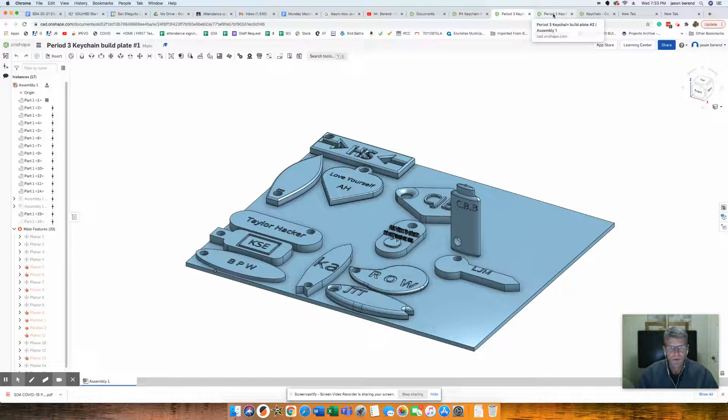Here are some examples from a class last quarter, so you can get the idea that you can be creative. The only requirement is that you have to have your initials or your name on these, so we can identify who did it and get it back to you. So that's the assignment.

If this looks hard to you, I'm going to go over something similar. You can pause the video and do something similar, then do something custom after that. All right, so that's what we're going to do right now.

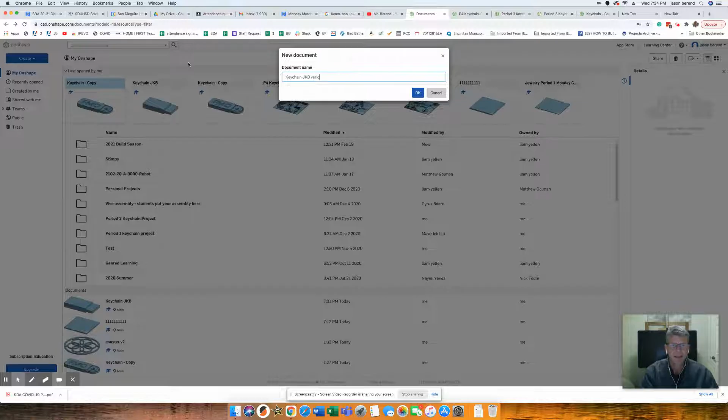I'll be giving you the dimensions that I think would be good. It would probably be a good idea to put your initials in the file name, that way we can know whose it is at a later time when we put it on a shared document.

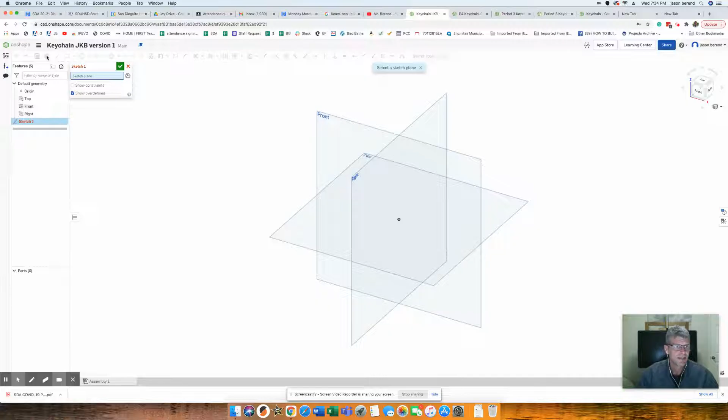You can design from the top, that's what I normally do, but this time I'm going to do something different. I'm going to design from the front. So I'll hit Sketch, click on the front, and zoom in. So I'm kind of designing from the side at first.

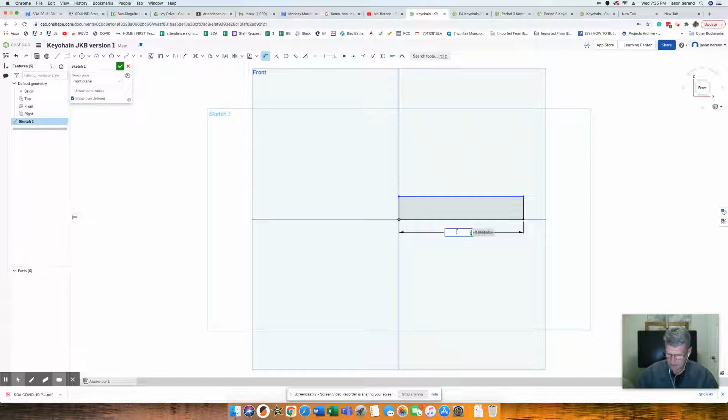Let's say you wanted your keychain to be - I'd say it should probably be less than 1.5 inches long on average, but it's up to you. And how high should it be? I'm going to say 1/4 inch or less, that'd be my recommendation, but it's up to you.

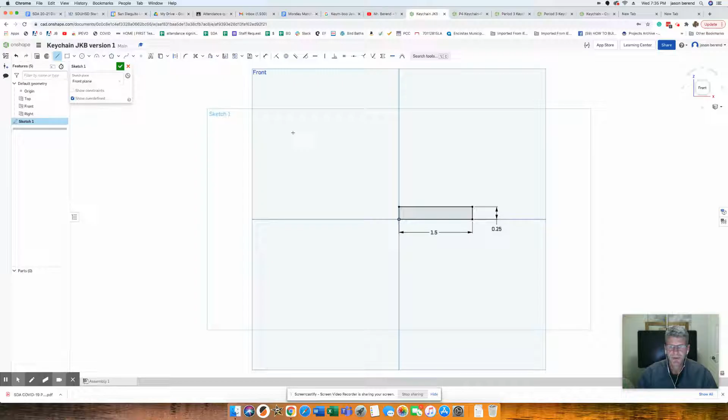On the last one you saw there was a bit of a profile to it, and I'll show you that and go over a new command too. Let's say I wanted this line to be 1/2 inch, and this line here maybe...

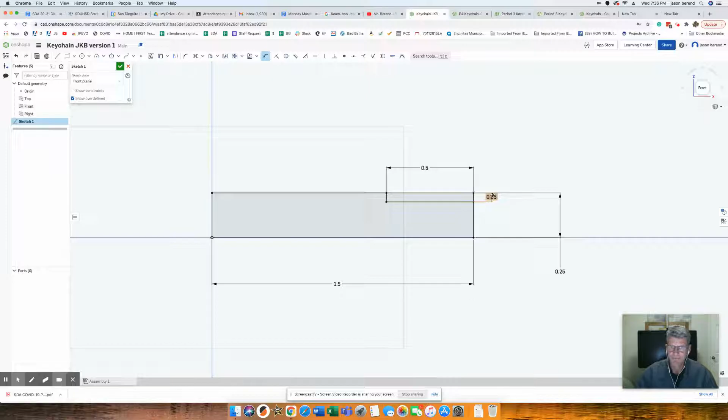So I'm going to do a command called mirroring. When you mirror, you have to have a line to mirror about. Sometimes I'll draw a temporary line, like snapping to the midpoint here and just drawing a temporary line. Let me show you how the mirror command works.

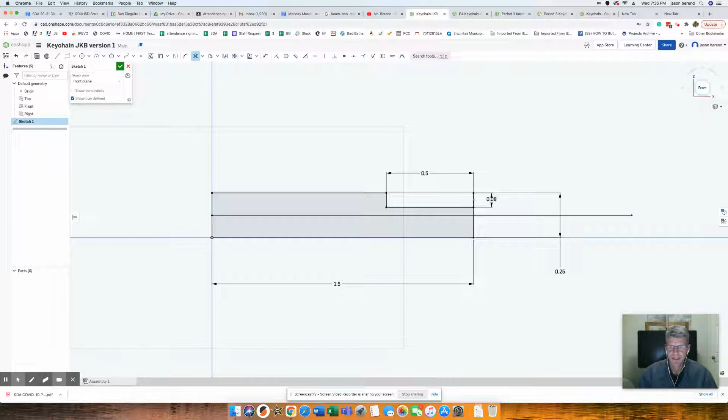Before I do that, let me just trim two lines here - this line and this line. So instead of drawing these two lines again and dimensioning them, I can just mirror them. The mirror command is right here, right next to offset, which we've gone over.

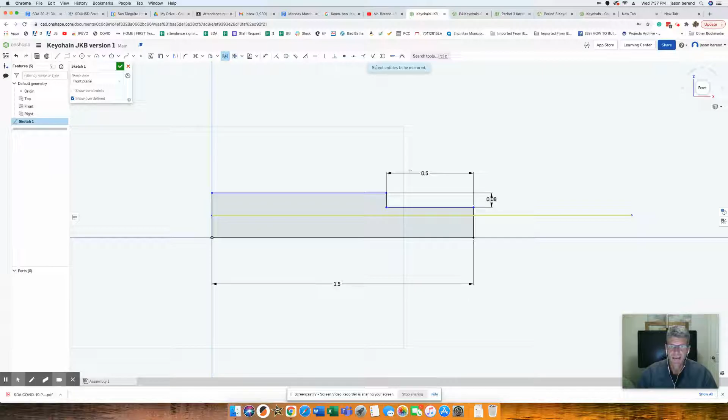It says select a mirror line, so I'll click this line. Then it says select entities to be mirrored, so I'll click on this line and that line. That's how mirroring works. I can press escape to end that command, and I'll trim this line - I could trim it or delete it. I'll trim this line and this one.

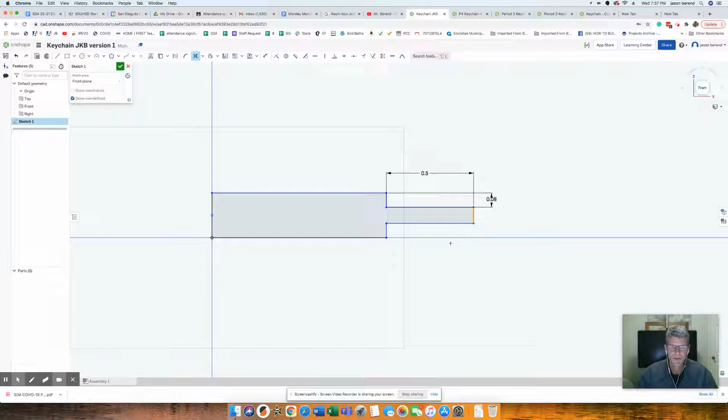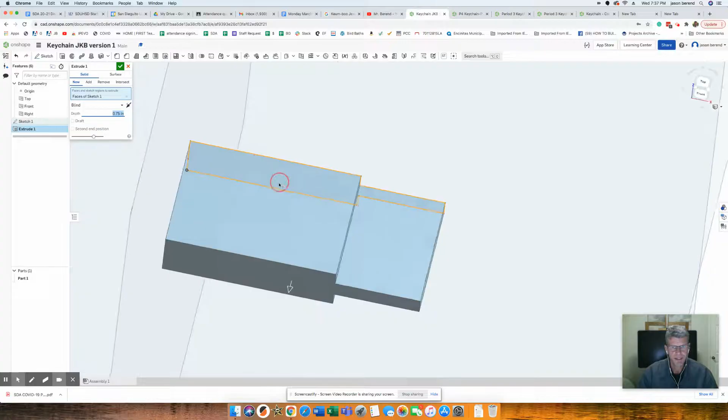Now I'm going to extrude it. First I'll rotate. I'm going to say it should probably be 3/4 inch or less, but it's up to you. Actually, I think I should have said probably 1/2 inch or less.

So now I'm going to go over a new command - the fillet command.

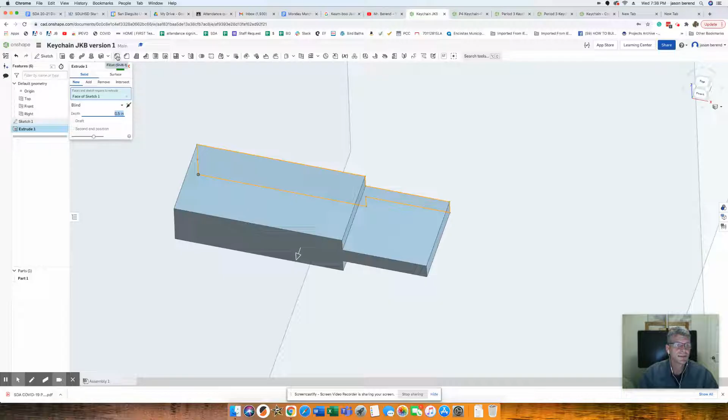With the fillet command, you can type in a dimension here and carefully click on corners like this, and adjust with the dimension how much you want the curve to be. Now it's 0.2, so if you have other sides you want to do, you can add them.

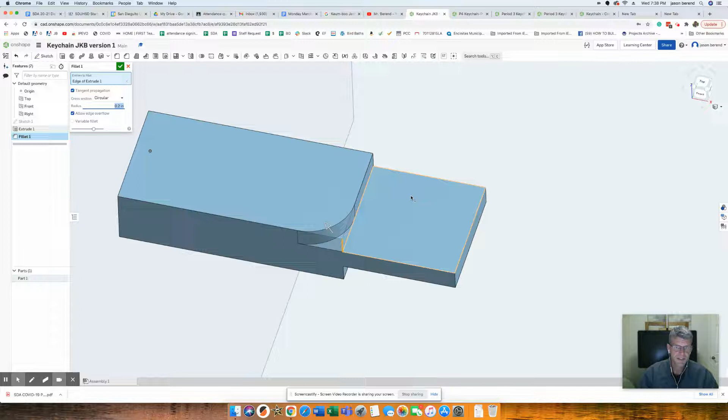So I could click on this one - notice that populated right there. I can rotate, and I can also get this side. But all I can do right now is 0.2, you can't have different ones on the same fillet operation.

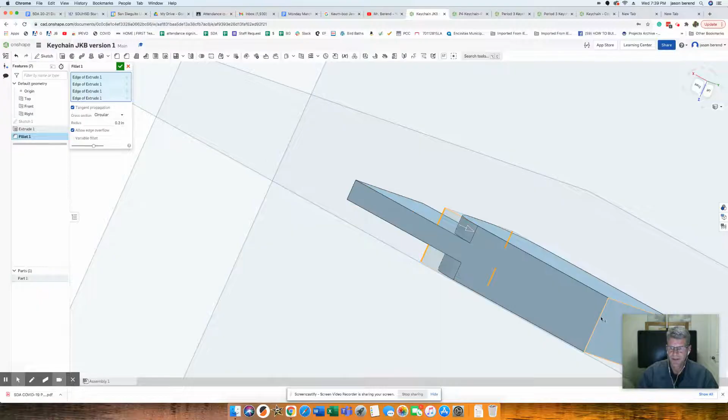Now let me show you what happens if you mess up. Let's say, for example, instead of hitting this line, I accidentally hit this line here. That's a mistake, I didn't want to do that. You just go up here and hit the X, and that gets rid of the last thing. It's no big deal if you make a mistake.

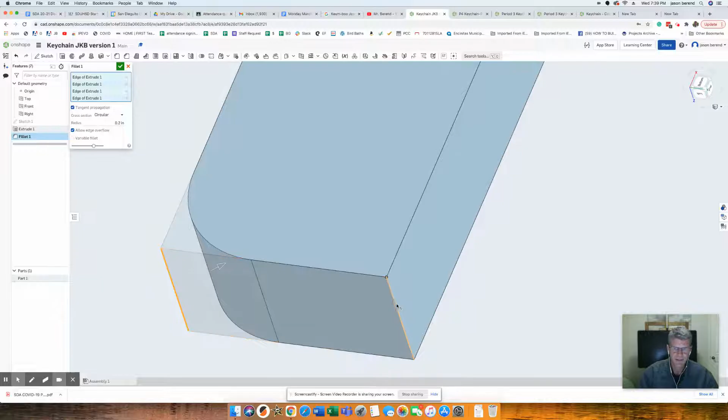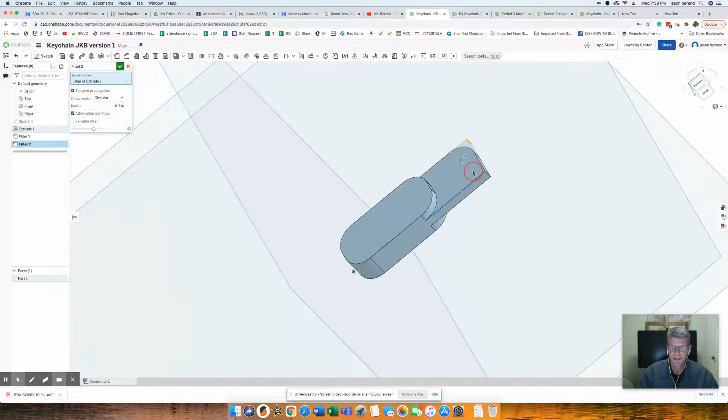So click on this line, and that's everything I want to do for 0.2. I could hit the green checkbox. I could do the fillet again, but this time I want to do this corner and this corner, but with something different than 0.2.

Maybe this one's going to be - what if I did 0.3? Would that be too much? I can change it to 0.25. So you can do multiple fillets.

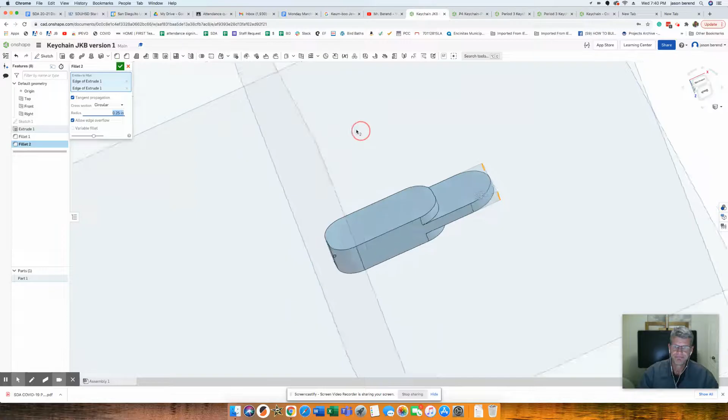Next thing I'm going to do is put a hole. I'm going to go ahead and hit sketch, telling the computer I want to sketch on this surface. And I'll rotate to the top.

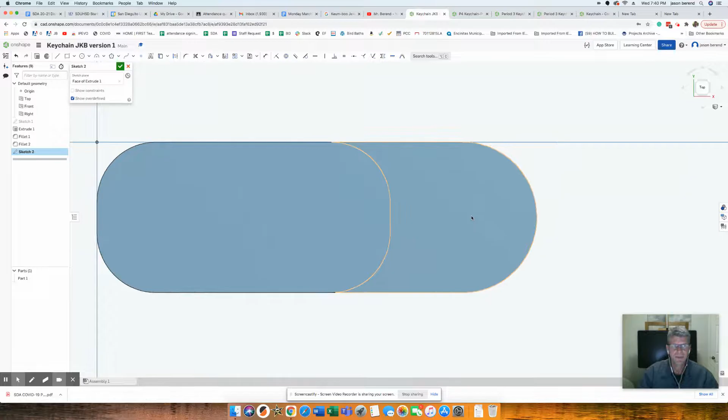Right, so I'm at the top, and I'm just going to draw a circle. I want it to be about that big. I'll put some dimensions on.

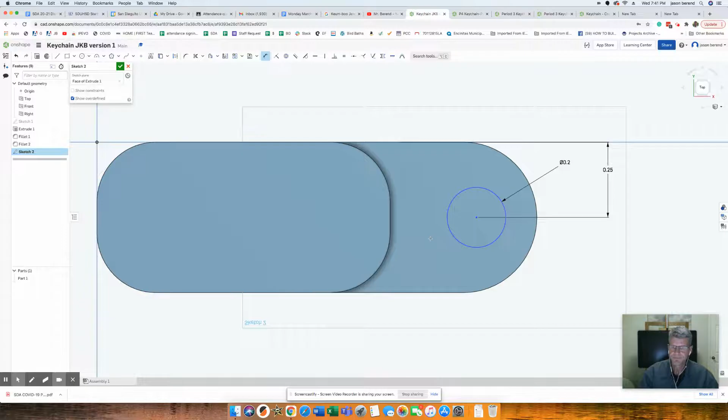First, make this an even number, about 0.2. I'll dimension this circle - left click here, and left click the top line here, and make sure that it's midway, which in my case would be 1/4 of an inch. Once I have that, I can go to extrude, but now instead of hitting add, I'm going to hit remove.

And if it's going the wrong way or something, you can hit this button, but it's probably going to work for you by just clicking remove.

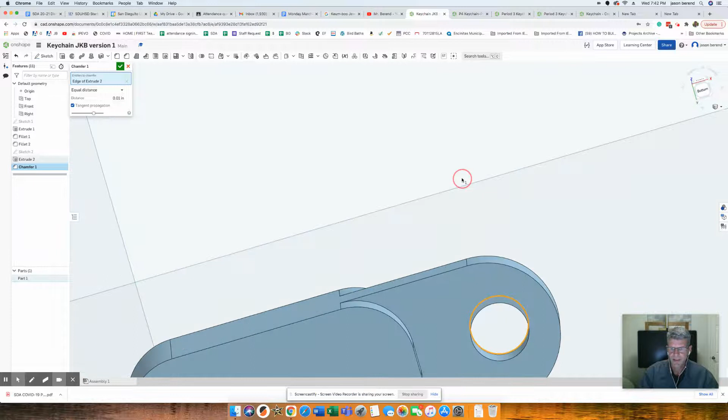Now you know the fillet command. The chamfer is similar, it takes sharp edges off things, and it's used a lot in manufacturing. So if I do 10 thousandths of an inch, maybe I want this to have a bit of a chamfer, as well as the other side here. I'll do a chamfer on that line, as well as this line, maybe all along there. Again, it's just taking off that sharp edge.

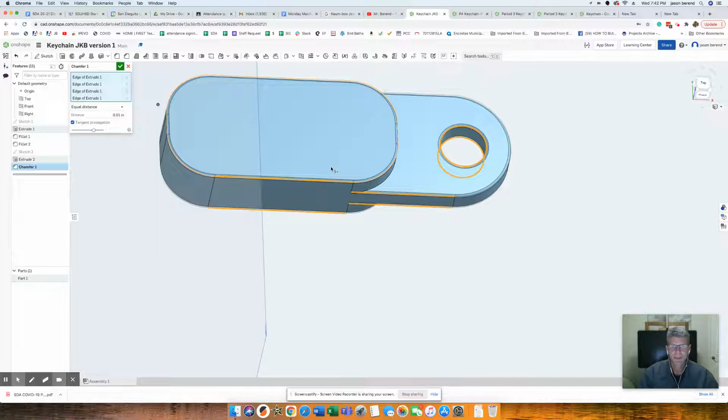Next thing I'm going to do is some text. So I'm going to click on sketch. I'm on my third sketch now, and I'm going to do it on this surface. So I click on that. Here's my text tool, and I'm going to hold down my left mouse button and just draw a window about where I want it to be.

Now, when we were plasma cutting or laser cutting, I told you to use this stencil tool because it's really good when you cut things out. But this time you can use any of these fonts because we're not necessarily cutting through it. So pick whatever you want, and you can type your name or your initials, but it's got to be something that can get this back to you.

If I do the checkbox, you can see that it's there, but it's too big. So how can I fix that? Well, let's see, I want to show you something here.

If you want to resize it, that's easy. Just use the dimension tool, click on this line here, and I could type in a smaller dimension. That's how I could do it.

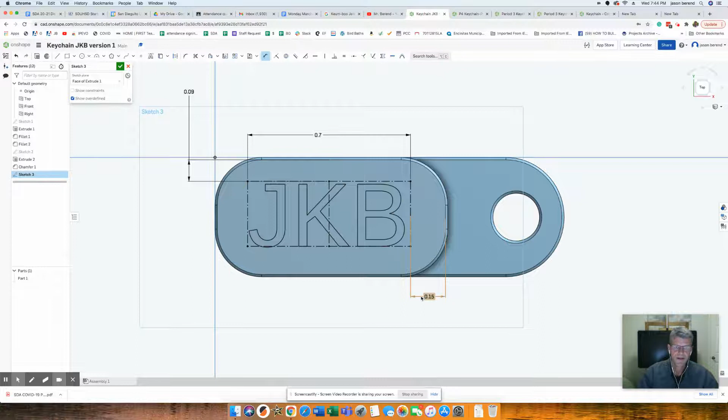So let's say if I like that, then I'm going to hit the green checkbox. Now what I want to do is click on Sketch 3 and go to Extrude.

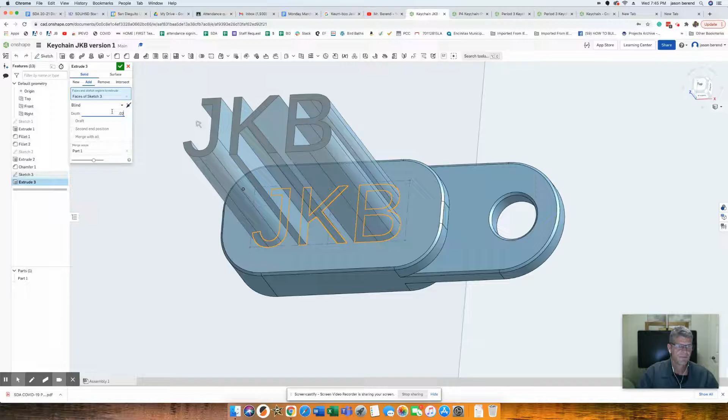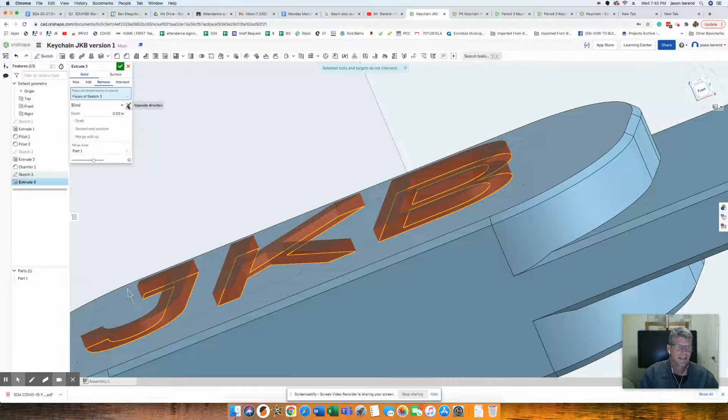And you have a choice now. You could have the letters come in or go out. So I could have it pop out a little bit, or if I hit this button here, actually that's not the right thing to do, or click remove, then it would be going in. I have to click this opposite direction. So by clicking add or remove and then clicking this arrow for the opposite direction, you can get it how you want.

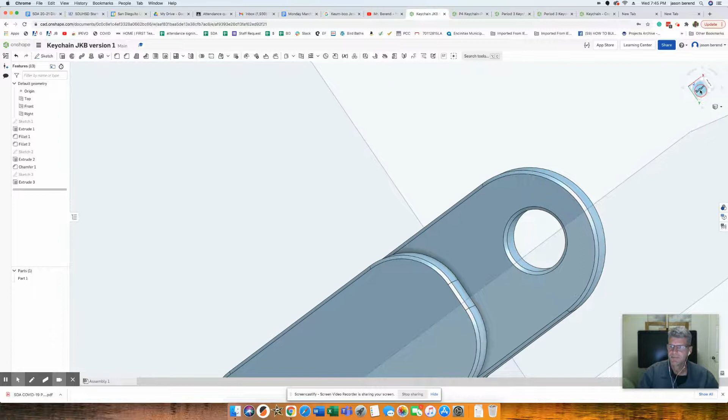So I'll do that, and maybe on the other side I could do some text too on the bottom. So I'll just go ahead and do another sketch on this surface, and maybe what I'll have here is...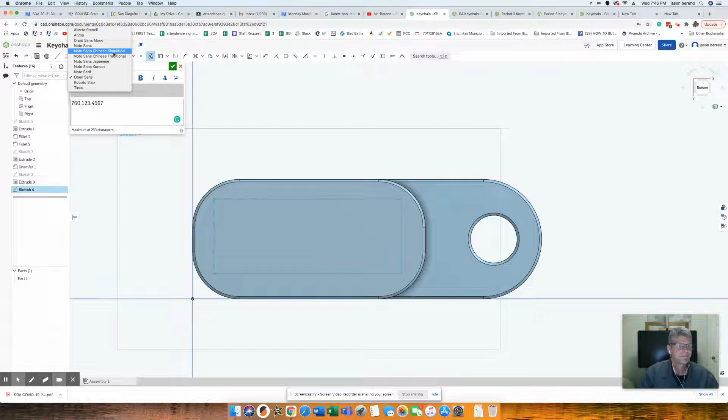Put a phone number, what if your keys got lost? Let's try a different font here, let's see this one. But you don't have to do that, I'm just doing an example here. I don't know why it comes in so big there, but anyways, we'll just add some dimensions and make this work.

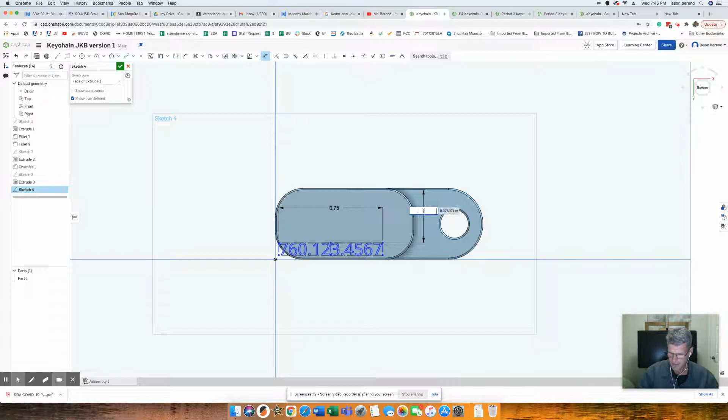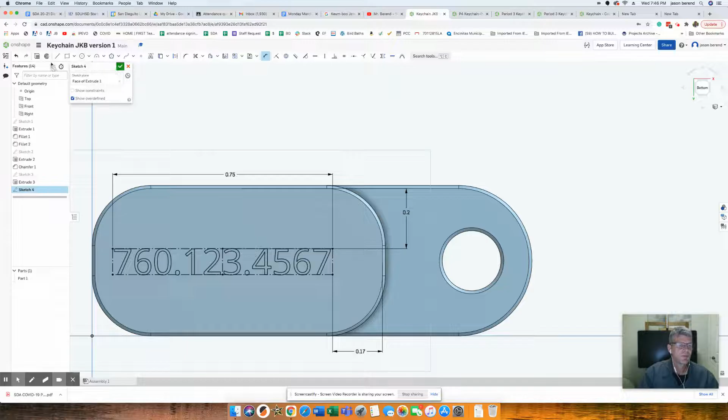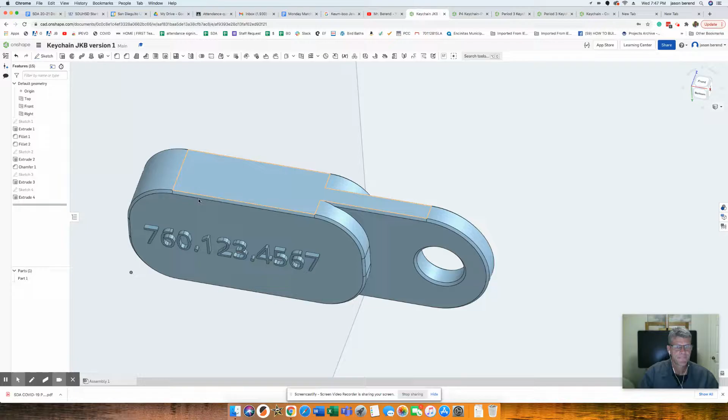So then on this one, I'm going to go over to the extrude button without hitting the green checkbox, it's just a bit faster. This time I'm going to have the letters pop out a little bit, so I'll do 20 thousandths, like that. So that's an example of doing a keychain.

You could design the same keychain 5 different ways, more from the top plane, lots of ways to do it, but at least you have a basic idea. And don't forget, at any time you can go in and make a change to your sketch. Sometimes it'll cause some errors.

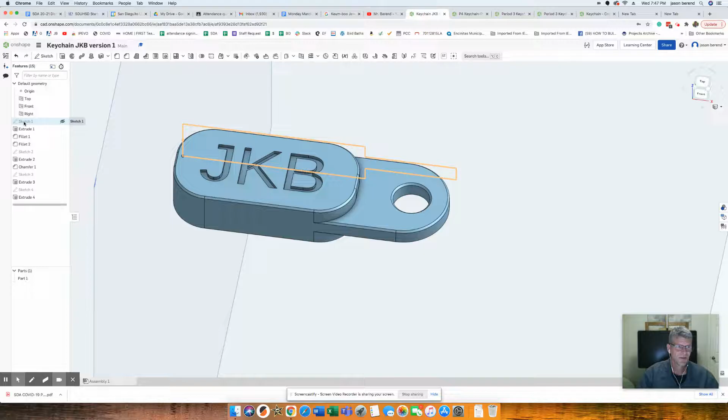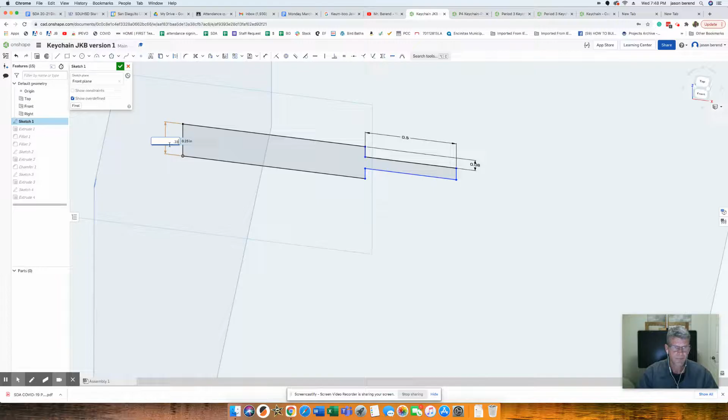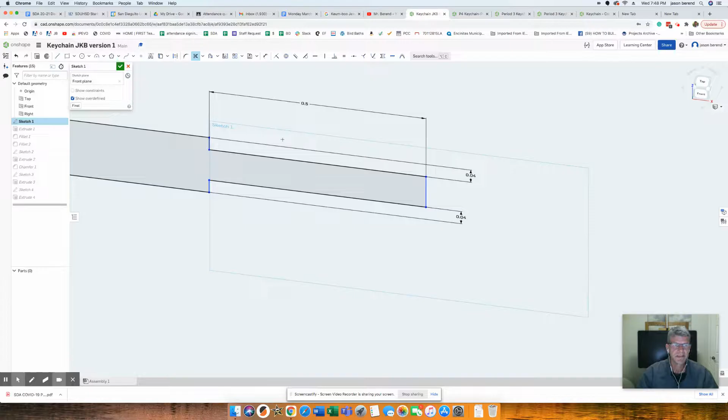So my point is that you can change things. I could dimension these two lines and have this be 0.04. So quick trim here - when you make changes, you might have to do some things. If I do the green checkbox, let's see what happens here. So you can see that I made a change, and with not too much trouble, I was able to make this thing less thick.

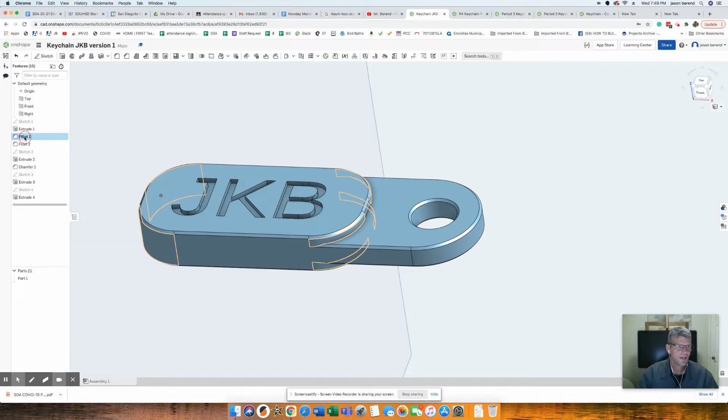So anything on here, you can go in and make a change. Fillet 1, for example, I could say I want this to be a little more, so I'll put a 5 there. But if you type in a giant number, it might go red and you can't do it. But that's how it works with Onshape for the keychain.

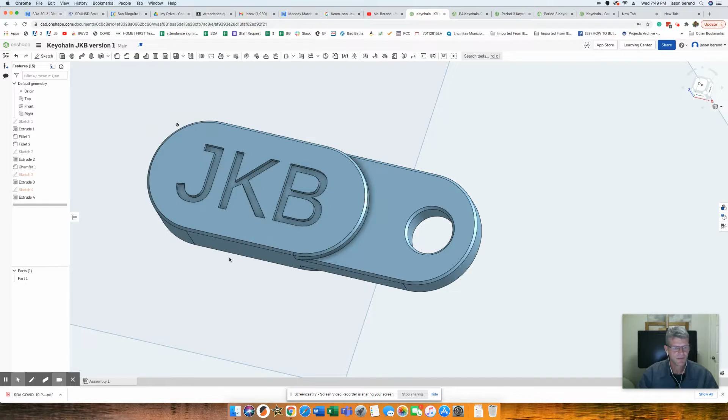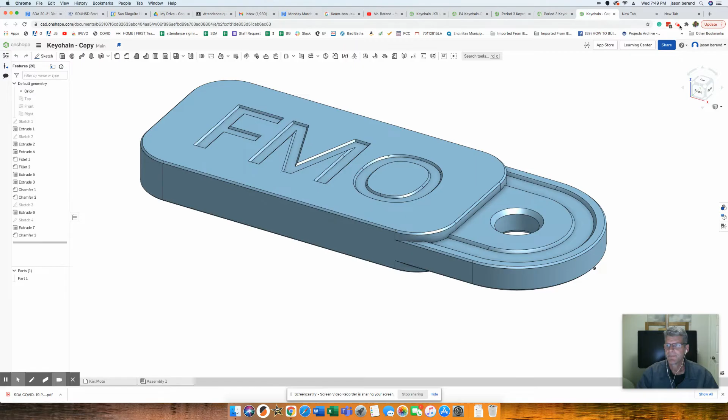Do your own design, don't forget there's lots of opportunity to be original and make something cool. Could even be a present for somebody. So good luck with that, and send me a private text if you need help, or an email, I'm happy to do that. All right, thanks for watching.